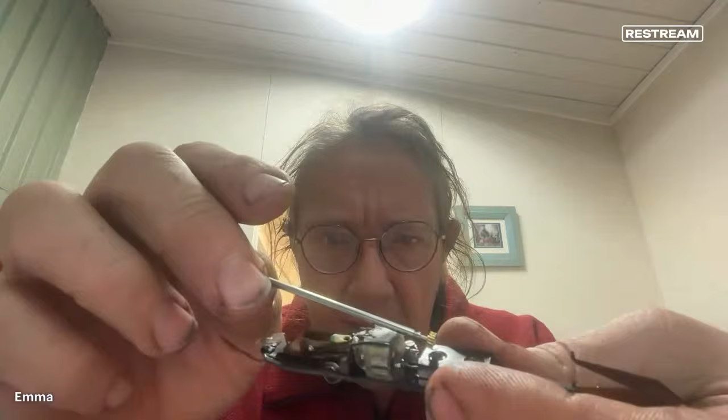This gear here drives off the motor. I don't know if you can see that. If you look at this motor, can we see that? I don't know. Anyway, probably not. In here where my fingers are, there's a gear. There, see that? Can you see that gear there? Probably not. In there. We'll point with that.

There's a gear. There's another gear on here. We'll turn this around so you can actually see it. This actually should drive that gear, and that drives the propeller. Now, as you can see, this stuff's pretty tiny. It really is. And there's a nice brass gear driving a steel shaft, which goes basically through here and attaches to the propeller through this hole in the back.

There's a shaft sticks out this end. I'll take my glasses off so I can actually see this. Right. Now, the problem is, and I don't know how we zoom in on this. Can we zoom in? Probably not. Let's have a look here. Don't know what that's doing. Anyway, all this is a little C-section clip here that holds this in place in a little groove in the shaft.

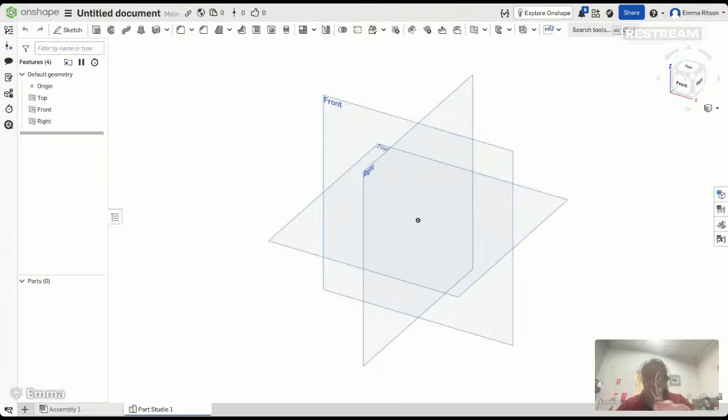And here's this shaft. Now, oh, look at this. We can do this. This is a new feature. We've never seen this one before. Righto. So there's a groove in the end of this, if you can see that. There you go.

The groove is probably too small to fit my verniers in. This pair anyway. Going to need some better measuring equipment than that.

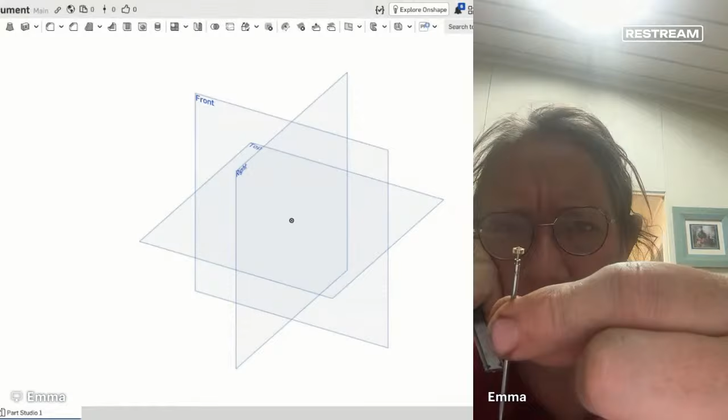It's German, so I think we can nearly guess that the bearing on this end and the bearing on this end would be the same size. That'd be a reasonable sort of an assumption, probably, because the shaft on each side is the same. Just measuring that. And Germans being Germans, I think that's what you will find. So if we measure this one here, we're going to go that's 1.5 millimeters.

The width of the groove, which is a really good question. I should have bought a decent pair of verniers instead of these old Minimax ones that are 100 years old. When I look at them, even the ends aren't exactly the same width. So that was a bit poor.

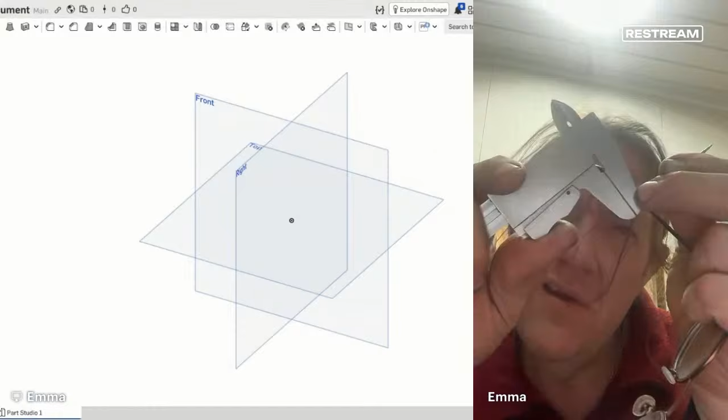It's a bit more guesswork, but I'm guessing that that is probably 0.8 of a millimeter wide, that groove. A fraction more than that, but 0.8 will do us, I think. 1.5.

Take care, John. Good to see you. Got to get up late tomorrow. That's fair enough.

So let's start with that. We'll go back here and we'll go to the front plane and we'll draw a circle on here. We'll just check our document workspace units. Make sure they are in millimeters, and they are, so that's good. We're never quite sure where I've been last time. So 1.5 millimeters.

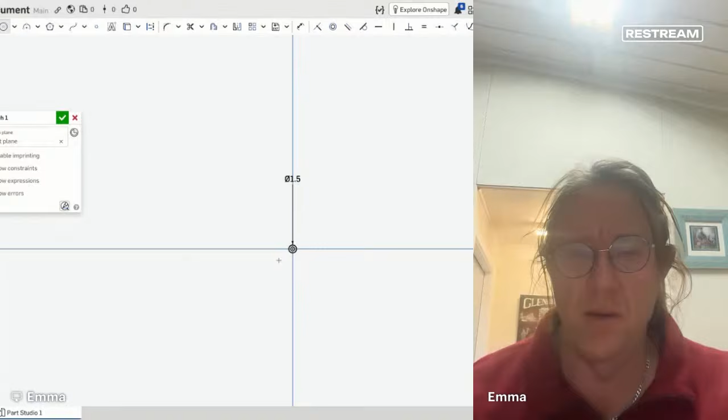Actual shaft diameter is 1.8. I'll tell you what I'm going to do, because these glasses are annoying me. I've even brought my close-up glasses. You can't tell the difference with me sitting here, but if I get up and do stuff, you'll be able to tell. There we go. That's better.

Now, we'll draw another circle. 1.8. And we'll extrude that. We'll call it 25 mil. That'll do. And we'll extrude the inner one. That's not it. Zoom it out so we can actually see it. Let's try changing this.

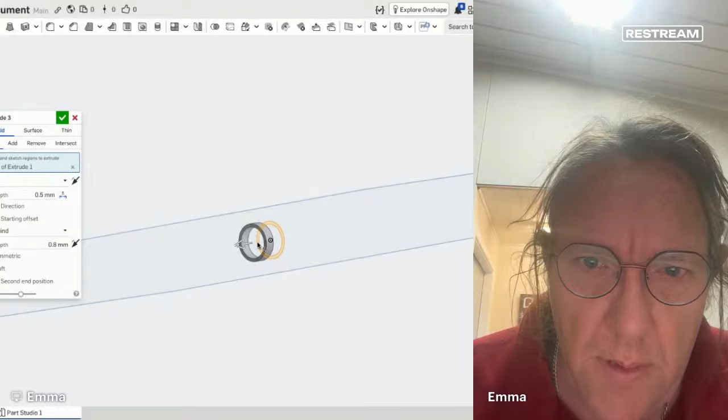Let me see what we've done there. No, probably not. There we go. That's what we're looking to do. So that's what the shaft looks like, and then it's got a piece sticking out for the gear. I won't bother drawing all that, but I'd say the shaft for the gear is probably

0.9 of a millimeter. If we put another sketch on this face here, 0.9, and extrude that one out. We'll call it 5 millimeters. That's sort of what it looks like. Right, blown up. Got a little gear on the end of it. But what we need is a fork to go in there.

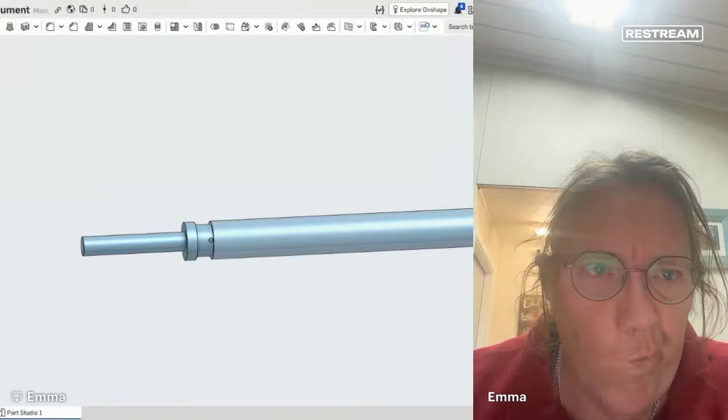So we'll put another sketch on the front plane like that. And a center point arc off there, which will give us a radius. That's not helpful. Let's do this.

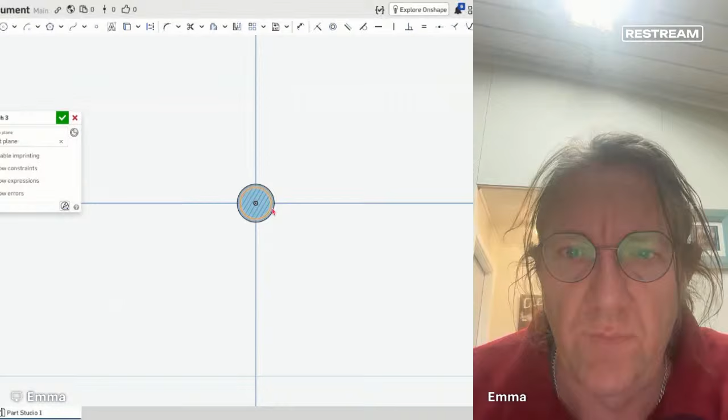A section view with the section plane, pick the front plane. There we go. Gosh, it's tiny. If we blow this up, then we've got an actual section of the groove pretty well. And then we can use that in our sketch. If we turn off our section view and hide this part, we've got the actual groove.

What I think we want is a piece of stuff about 3 millimeters across and probably 5 millimeters deep, and with a groove from here up there like that. Mirror that one with a mirror line and trim that. Extrude that 0.7 millimeter thick.

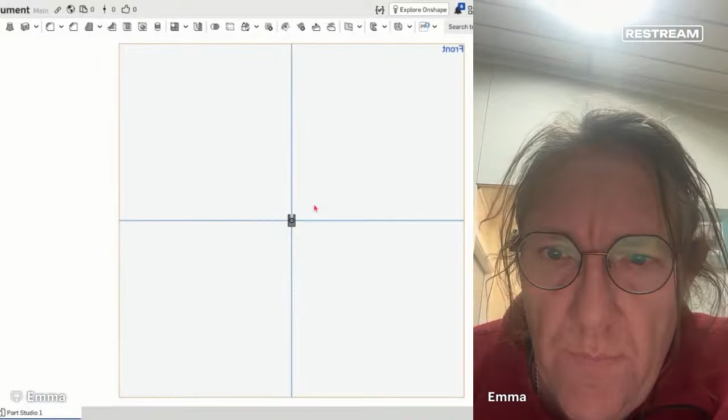Turn that back on to make sure it lines up. It probably doesn't. We probably flipped it the wrong way. Let's go that way. Now, I think that's sort of what it should have, and that's what it had originally. I don't think it needs to be this high. We edit the sketch. Probably put a line across here like this.

Now, I can't see what you're actually saying there, but I'm going to have a look in a minute.

Anyway, I think that's what we need, is one of them. And if we had that with a little offset on here so that we've got a congruent where... don't know, probably cut the other one out and just glue that one in where it should go.

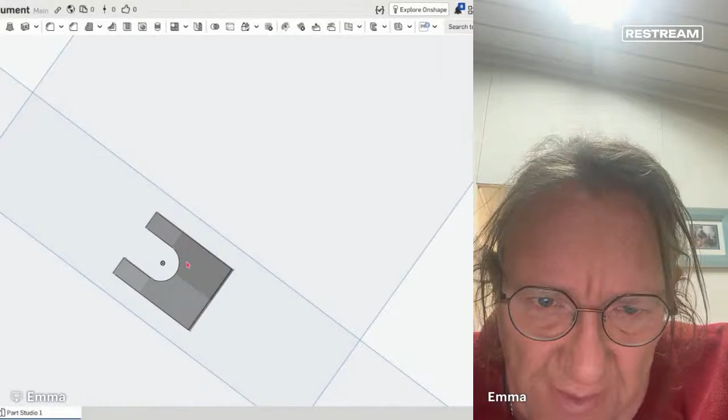I don't know. Or do we leave that piece in place, which is actually pretty much what's left is only the bottom half, and we put an offset on it. I don't know about that. Anyway.

Good luck with the wasps, eh?

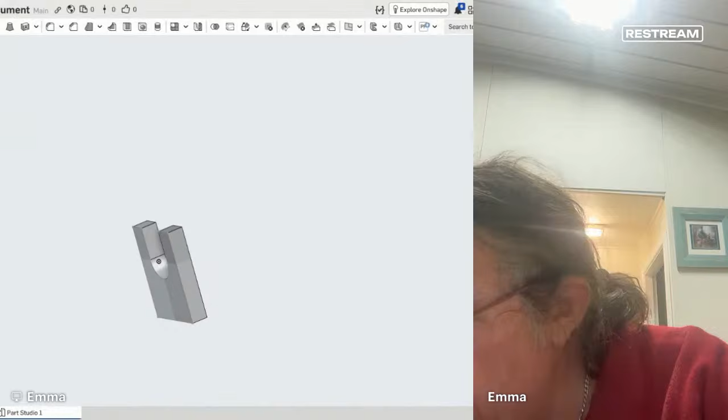Anyway, so that's sort of what it needs, I think. I don't know. Looking at it. Don't know. Maybe it needs to come down beside that.

So instead of having this hole that actually fits over that in the slot, we leave the piece that's still there that it sits on for the correct depth and make another piece. So if we change this, we can just change the sketch. Change this sketch. .045. .45 actually, like that.

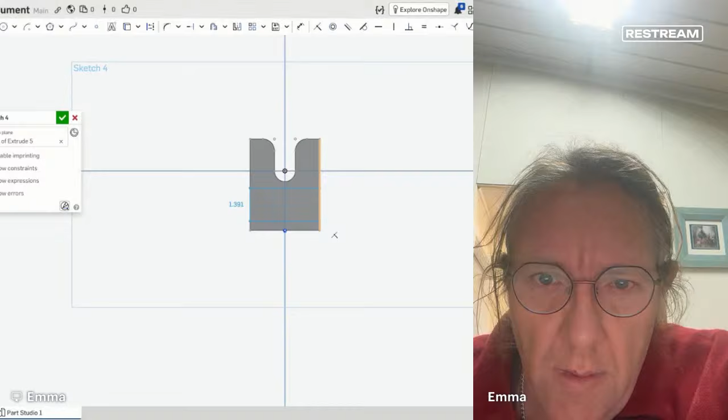We need to make a sketch on the back of this. We'll blow this right up like this. And a corner rectangle we'll go with. We'll start there. We'll come up to there like that. 1.6, something like that. And we'll extrude that out. How far? Let's go 1 millimeter. So that's what we got.

If we printed that laying down like that and put a little dot of super glue on that face there and slid it in after we'd put the axle in and lined it up nicely, I think that should fix a lot of problems. So we might do that. Anyway, that's one job. Maybe. What I'm going to do, if we have a look at this, actually just use the same pickups on the front as the back. So there's pickups on 4 wheels on this.

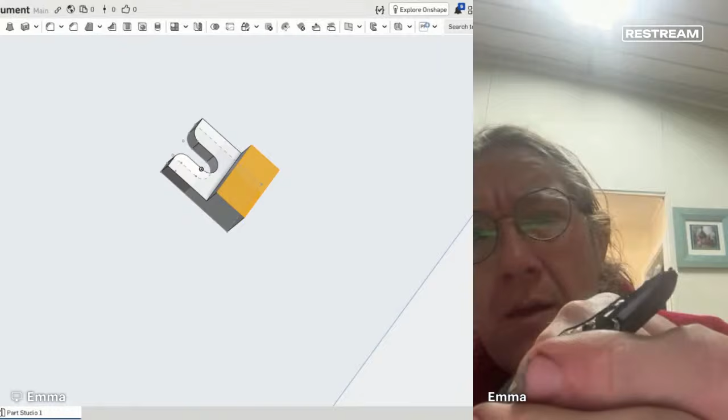We've got a brush and an armature on this end. And we've got some sort of a diode probably to stop any bouncy running. And the motor's screwed in with 2 screws there, one each side. There's a worm drive and another gear in here. So it's 2 to 1 or something behind the axle, because if we see the worm, excuse my dirty fingernails, there's a worm in the front there above my finger. It doesn't line up with the center of the wheel. So that must be geared down there.

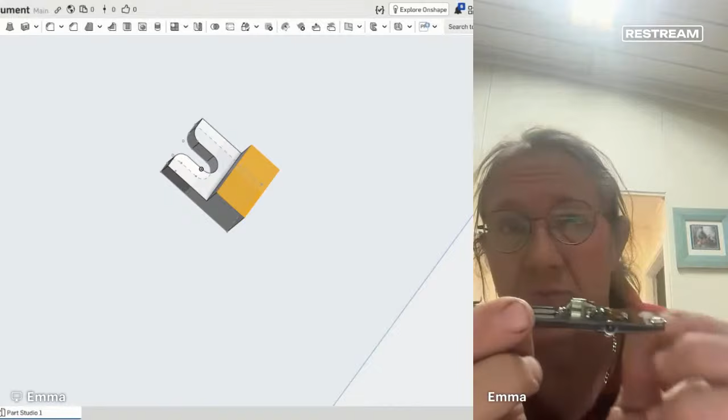So the propeller drives off the back of that motor. See, off this end here. It's got a light on the front. Oh gosh. A globe on the front there, if we see that. And that works in a prism. It gives us headlights. There's no tail lights in this one. So it's quite a simple thing. All I'm saying is that if you want the brand new one that's in the catalogue this year, it'd want to be very, very good for the price that they're actually charging for it.

I believe this to be actually die cast. It's very, very thin, but it is die cast. It's got to be a fun thing to put back in. But it's gone.

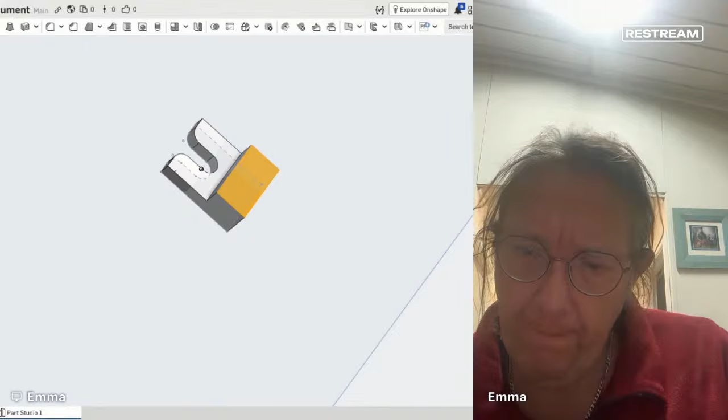I'm not sure I'm going to put this back together till I fix it, but these pickups stop the vibration too, so they've got to slip back inside the case. On the back. Hasn't actually slipped up in there yet, but give you some idea.

Very cool machine. I'm going to put that back in there upside down and that in there too, and we're going to print a piece and glue it up, and maybe tomorrow night I'll put it together. Anyway, one job. Now, that's the technical job.

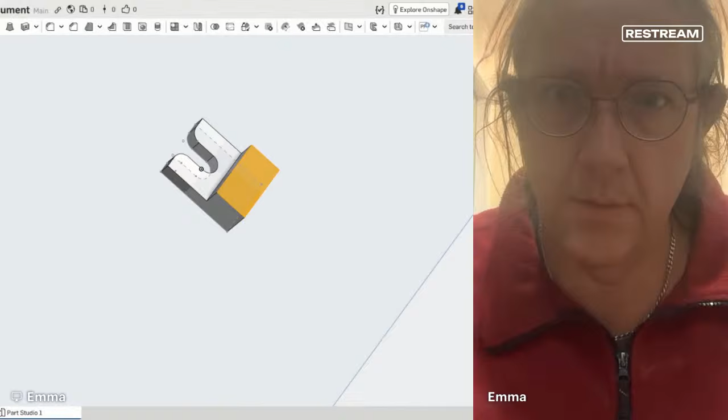Now, I can do this too, apparently. No, I can't. Nope, that doesn't work. Anyway. Fashionable.

What I have here is a disassembled tube expander. It's got 3 rollers in it. It's fairly straightforward. Really fairly straightforward thing. I was going to try and take it apart, but I haven't got it apart. Probably be enough to make one.

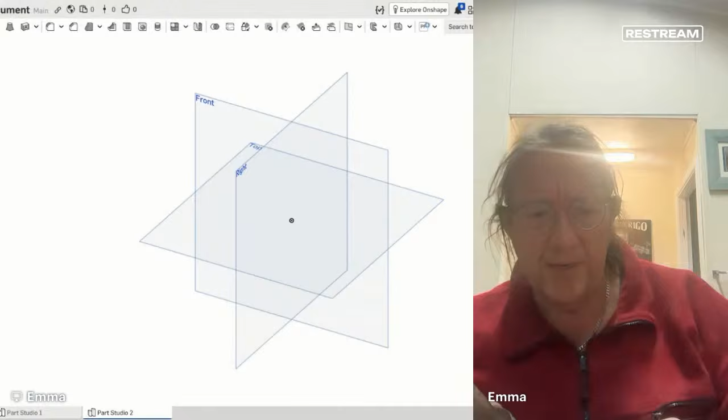We've got a collar. We should have a roll pin in it to line up with this groove, but the roll pin's missing, I've discovered. So it's probably just as well I worked that out before we tried to use it. All right. It's got 3 little springs in it to hold it all parallel. That's how that works.

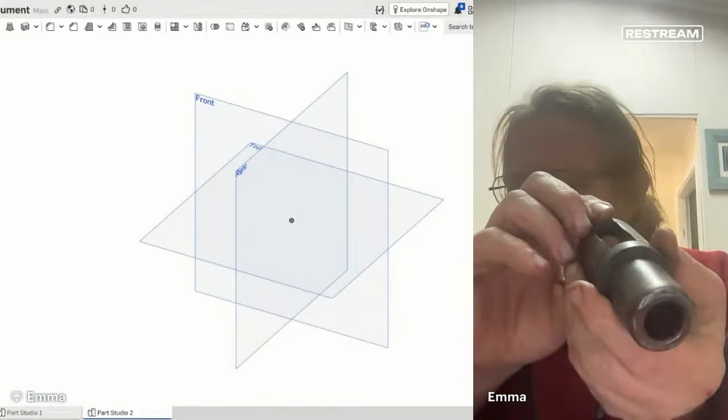And it's got some interesting geometry in here, so I don't know how it's made. It all seems to be one piece. Maybe. Seems to have 3 holes cut in it that seem to be fairly critical. And a parallel hole through the front, through the back, and right through. So the hole's the same size, I think, on that side as that side. So this hole goes all the way through parallel.

And then there's 3 little wire springs in there. I don't know if you can see that. There's a pretty good chance you can't see that. 3 little wire springs that hold it in, and that's the secret to what keeps them parallel. They're definitely springs, and they're definitely wire, but they seem to have been drilled. Honestly, don't know how this comes apart. It must come apart.

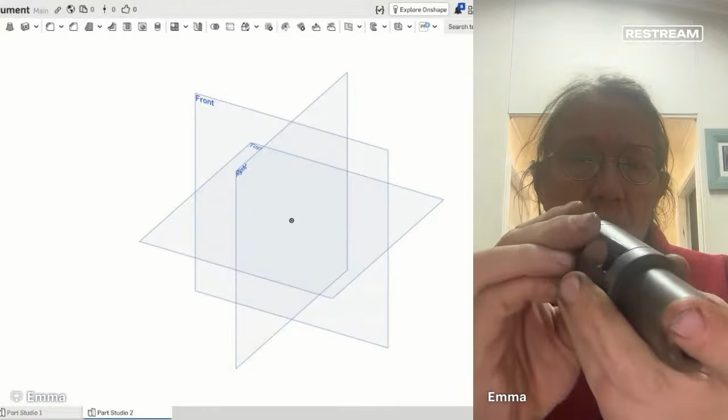Maybe it's all one piece because it has got a bit of a skew on there, and I don't know if that's original or not. It could be just overuse. If you're making one, I don't know how you would drill and put those 3 little springs that hold everything together in there. I really don't know how you would do that. Anyway, let's draw it up and see.

Where do we start? Probably with the body. At the beginning, maybe. One inch 640. Inch and 5/16. Inch and 5/8. Inch and a quarter. The hole through the middle is 715 thou. Both ends, like we said. So let's draw this up and see what we end up with.

For those who came in late, all we've done is messed around and made a part from a broken Märklin locomotive. Try and get that fixed and demonstrate it next week.

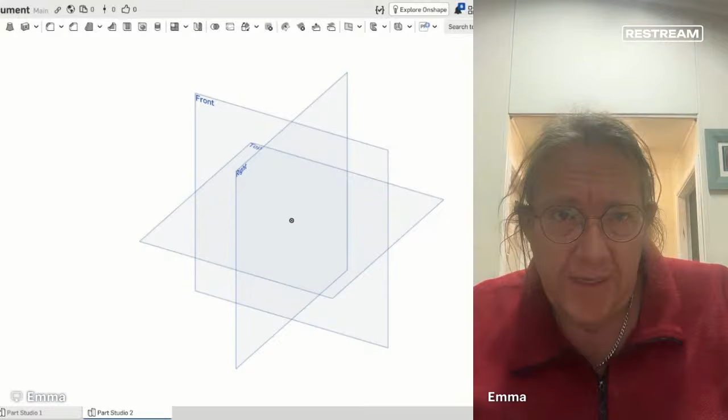Looking at this, we're going to change this. Drop this down here to where it says workspace units. We're going to change this to inches because we can. And tick the green box. Now when we start a sketch on the front plane there, we can draw a circle and it comes out inches rather than millimeters. So first circle, 0.715, which is a hole through the middle.

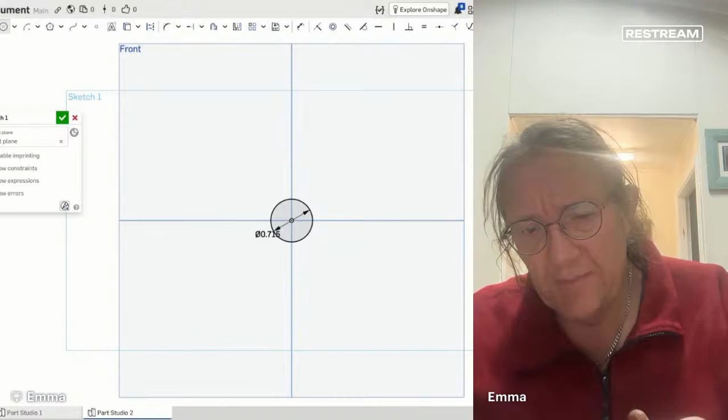Then the outside here is, depending where you measure it, 1.650, 1.620, 1.650, 1.660. And that must have a taper on it. 1.645. It's got a taper on it. It's only 15 thou, and maybe it's just wear. Are we going to worry about the taper? Probably not. Let's make it the full diameter.

1.665. There we go. Probably the first thing we do is extrude that along, and it's got to be how long? 2 and 5/16. 2.3125. There we go.

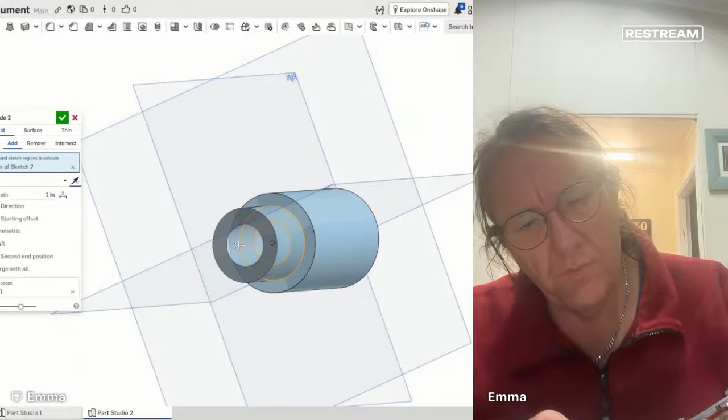Now, let's put a sketch back on this plane at the back of it. We'll call that inch and a quarter. 1.25. And we'll use this project or use button here to collect that. So now we've got the two sketches. We can extrude that, change the direction so it looks like that. And we'll make that, how long is it? What did I say? Going to call that 1 5/8. 1.625, something like that.

We've got the main body drawn up. And put a fillet on there, which is, let's call that 1/8 because that looks about right. And that's the start of the first piece. You know we haven't brought the pin down, don't you? We're aware of that anyway.

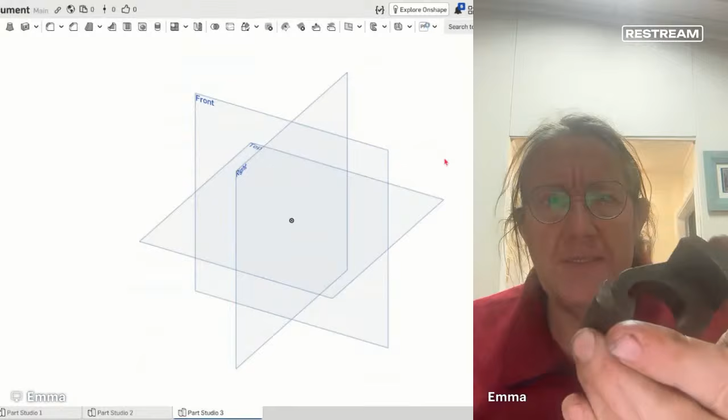If we start another part studio here, and we draw up this part, which is the spacer off the tubes. Not a particularly complicated thing. Where do we start with this? We start with a circle that's 2 inches diameter and another circle that's, call that 3 1/8 inches diameter. It's actually 3 3/32, so it's a bit less than 1/8.

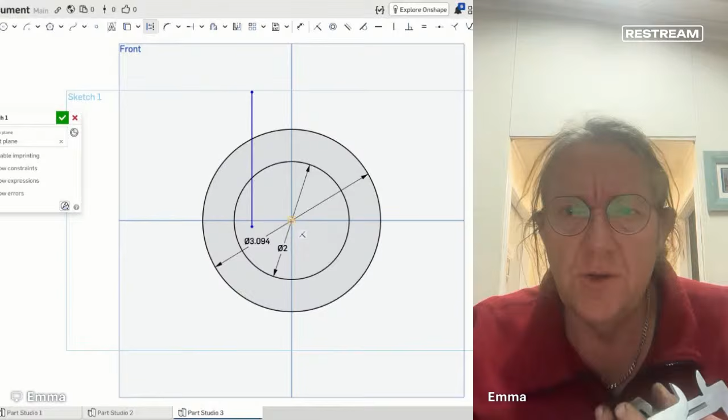And another circle that's 2 inches diameter. And this on the end, across the end here is inch and 5/32 because someone was really being helpful there. So we need to draw a line across up here like this, probably the easy way to do this. And then another line here, which will make a construction line from the center up here. And then we can just measure the distance across those lines.

With a dimension on there, tap on that. That gives us the actual dimension, which is 1.5375, which is a stupid fraction, but there we go. And we probably should mirror that one. Use that as a mirror line, mirror that one. And we need to extend this one down to here. And this one down to here. And then trim this piece.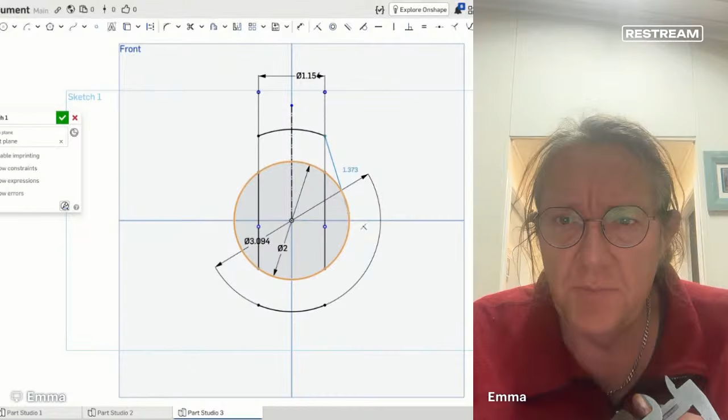Trim on this, so we've got that circle there and that circle there and this circle here. So what we need to do is go from there and attach this one here where, see, when we move that, this one is attached to the point, but if we move this back here, we get a tangent there, see? So that's what we want. Press escape there. And the easiest way is just to use that as a mirror line and mirror that one. Use that as a mirror line and mirror that one and that one. And then trim that out of there. And we've got the actual shape.

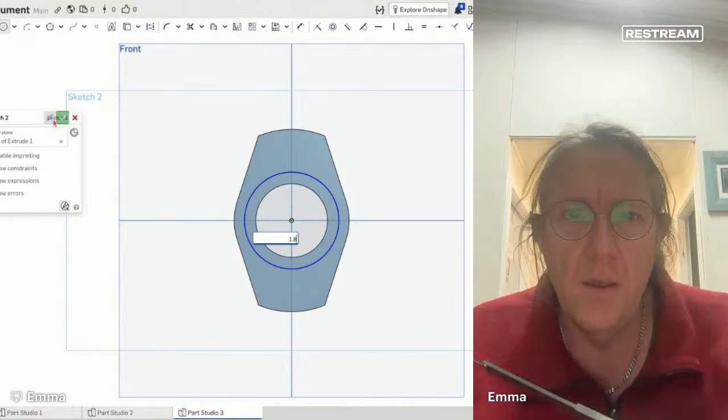If we have a hole in the middle, which is the same 1.25 inches, 1.25, and we extrude that shape 1.125 inch. Stupid fractions. We've got basically the start. There's a boss on this end which is 1.8 inches. Don't know why. There. 1.8. And the project or the use button, we click that too, then we can extrude that.

And how long does that stick out? Nothing on this is a standard fraction, really. We're just making them up as we go along. Maybe it is metric. 0.2 an inch. That's how that looks. It's got a nice flange on it, so a nice fillet on there. So we might just guess that, something like that.

And this centerpiece in here that cut out. Yep, always forget something. I'm a bit disorganized. That's cut out. What do we got? 3/4 inch cut out. And this circle here is pretty roughly 2.5 inches. This is a lot dirtier than the last job we did.

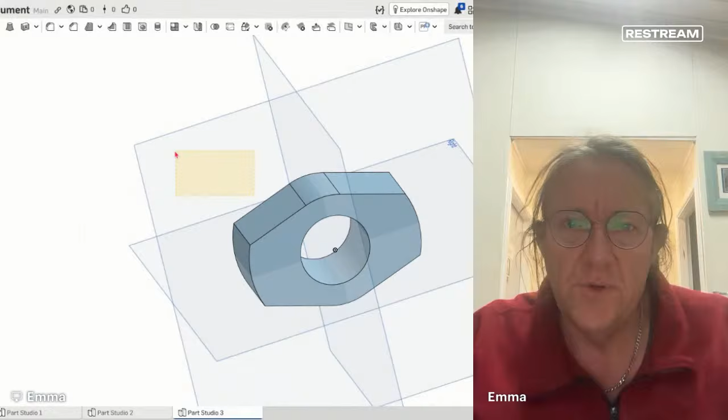So on the other side to the boss, we turn this over. Yeah, on this side, we sketch right on that plane there. Put a circle on here, which is 2.5 inches, we said. And extrude that removal 0.75. That's that piece made. So it's pretty straightforward, but that's what that looks like.

Just to distinguish it, we're going to edit the appearance and change it to a different color. So we'll change it to light green, something like that. These two bits go together like that, see? Now this thickness across here should be about 9/16. If we use the measuring tool, look, there's 0.575, that'll do.

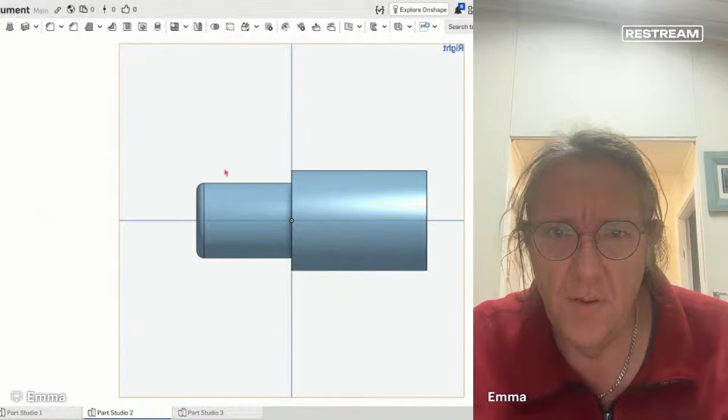And what we found is that this collar is the same size. Oh, it's a bit bigger. It's not going to work. I was wrong. It's the same size as that, though. So new sketch on that plane. If we use that line there, we've already got that one. And another one here, which is 1.8. And then we extrude that. And it's a new piece. It'll give us a different color.

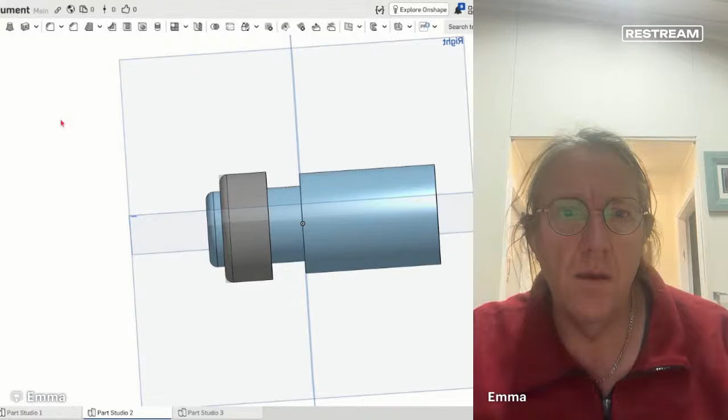And we make it, how wide is it? 0.8. And we have a starting offset of 0.575 is what we said. That's where that collar fits. Collar's got a matching fillet on this side, so we just do that. And it's got a pin through here, which looks to be probably a 1/4 inch roll pin. Yep.

So if we put a sketch in here and we use a project tool, select that, click that and turn that into a construction line, and we use that line too. And that line, we can extend this line here to there. We're done there. Is that right? We can extend this line here through to here. And it's not quite right, so we're going to just trim that. Like so.

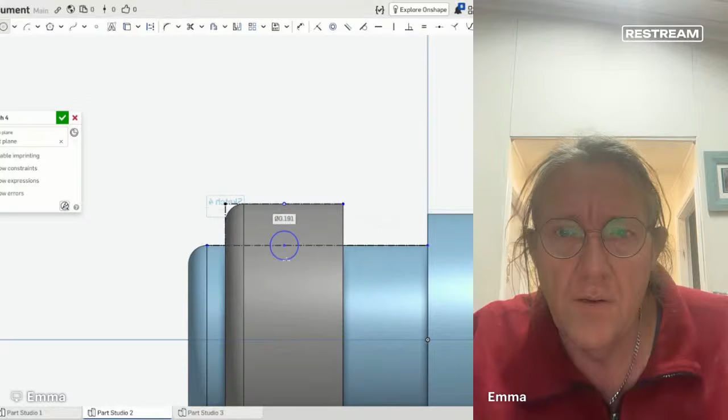Now we can draw a 1/4 inch circle on here, directly in line with the center of that line, which is the edge. And extrude it. Make it symmetrical. Make it 2 inches long. Remove it from this piece and this piece. And we've got a hole there for a pin. If we take this away, we have the right cutout there, which is the same as what we've got on here. There, see?

When you redid the spindle on your lathe, I assume you use carbide for boring it out before re-sleeving.

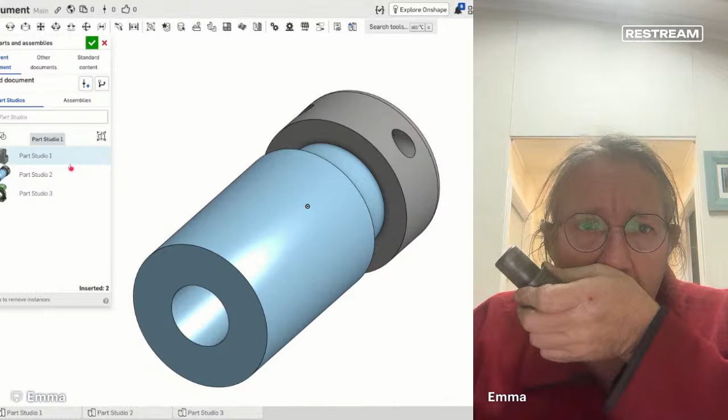So we can probably assemble this. We insert this part. Oops. Try again. So we make a mate on this face here. That one. That one. Then fasten these. And that needs to be offset. Oops.

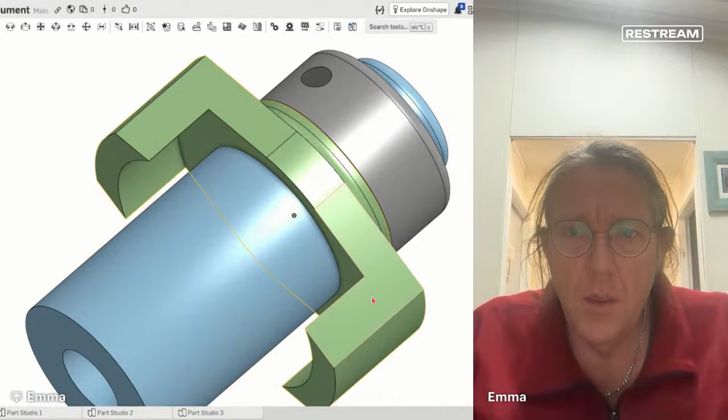Try that. There we go. That's how that should work. Part one's this one. If we fix that, and that should spin on there like that nicely, how it should. That's how it should work. Now,

That's a bit disappointing. 10mm collets are a bit small and useless anyway. Morse 1 is not really the answer. If I was doing it again, and I'm going to address this problem rather than this, I wouldn't bore it Morse 1. Here you go. What I would do is bore the spindle nose out to ER16, I think, and make a special nut for it and put 16mm ER collets on it. I think that's what I would do.

As far as that's what I would probably do if I was putting a new collet system in. I don't think that I would use Morse because I don't think it's particularly useful in the spindle. I would probably have a good look at it and draw it out. And if there was enough space, I would machine the spindle nose out, set it up nicely on center.

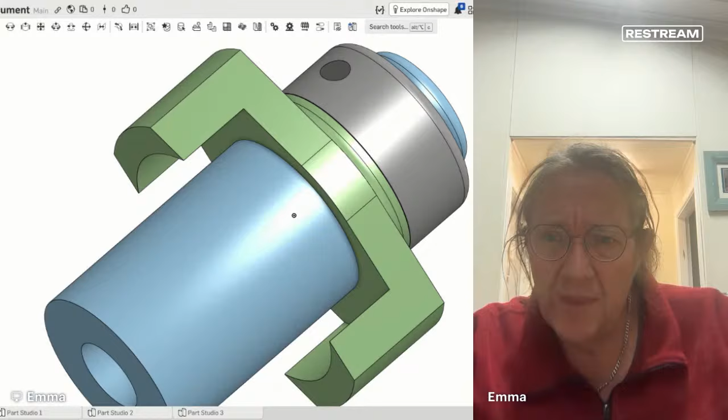This is a bit of a challenge. Out of the machine and bore it in a bigger lathe or in another precision lathe or something like that. Bore it to ER16 and then make a ER16 nut with a spindle, the same thread as a spindle, which will be 3/4 16 or something stupid. Anyway, that's a thought. That's food for thought. I think that's what I would probably do because that would make a fairly useful machine out of it. And give you a bit more through the drawbar too, which would also be helpful.

Anyway, so we've got this sort of half-assed right. Now, with this spinning like this, now some interesting geometry in here, guys.

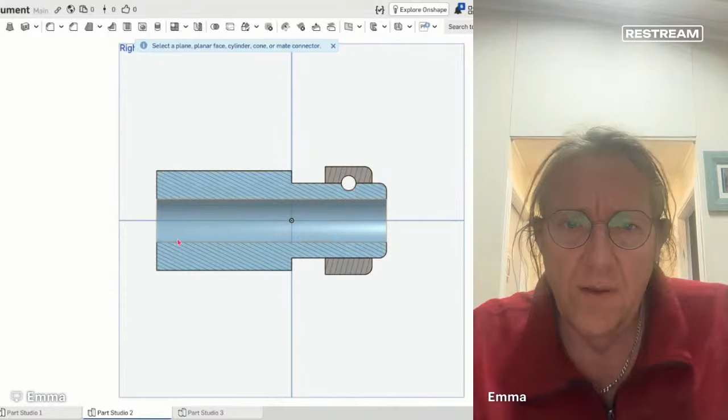So you know. Firstly, there's a relief in the front and the top here. If we go back to this Part Studio 1, Part Studio 2 it was, here. Right. If we make a section view here on that plane, that's halfway through, right? And we do a drawing on this plane, sketch on there.

What we've got is we're going to use this line, I think, and this line. And we'll draw another line, which is probably about - I'm only guessing this because it's impossible to measure. If we go back in here like this, and then measure from there to there. And we'll call that it's about 5/32,

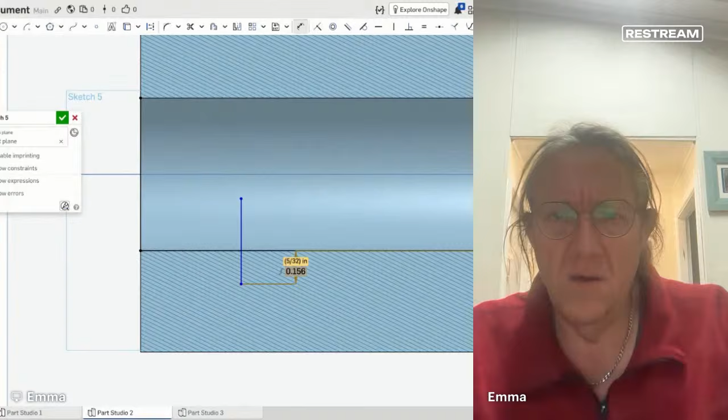like so. And then this distance here, which we can measure, is about 1/2 inch. So from there to there is 0.5, right?

Now there's another line. Measure here, another line here somewhere. Bear with me here. That's impossible to measure too, but I reckon it looks to be about 1/16 of an inch. From there to there. Then this line here goes from here, where these two intersect, down to the end of this.

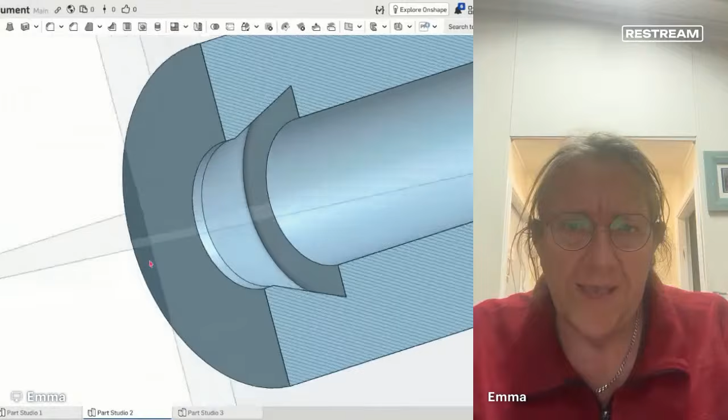And then we can draw another line there like that to make a section there. And we can revolve that. What we need to do though to do that is on this sketch still, we need to put at least a construction line down the center. Something like that. And then we can revolve that. Revolve axis is this one. And it's a removal. So that looks something like that inside there, right? For reasons that will be apparent at some point in the future. Are we following? Because I'm not.

ER11, yeah, that's the trouble. But you may not get - if you can get collets, that's great. On the lathe subject, if you can get collets, that's excellent. Anyway, if you can get collets, that's great. But good luck with that. Collets and drawbar are definitely a better system.

And I would have a look at Sherline because I believe they probably do a 10mm collet set if you've got a budget. If you don't have a budget, maybe that's out of the question, but I think they do a pretty nice collet set. Worth a look. And probably just adapt it to fit them because Derbyshire collets or Lorch collets or whatever will probably all fit. They'll be different threads and things. So you might have to make another drawbar, but that's not the end of the world.

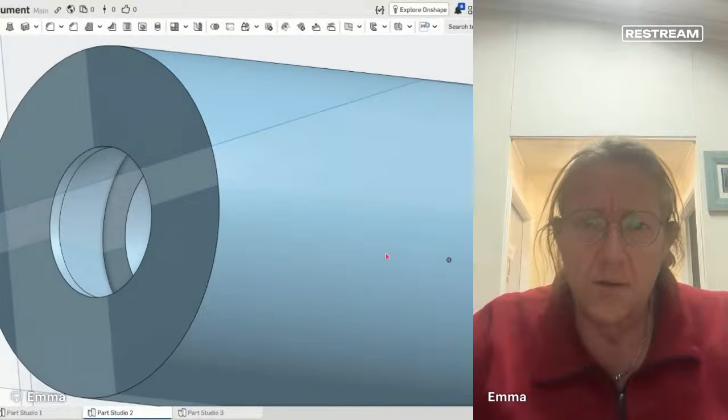Anyway, if we turn off this section view, what we've got is that hollow inside there, something like that.

Now, there's some interesting geometry in these, I think. I really don't know how they make them rather than just machine them and file them. I don't know if there's any other way to do this. But what we've got is a slot in the side of this.

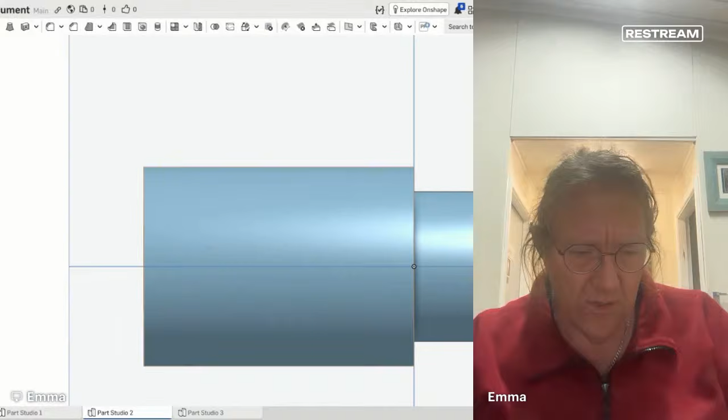So on this surface we need to put another sketch on here, on this plane. Now I'm going to draw a line in here, and I'm going to put a measurement between there and there. It's 3/8, 375 thou.

And we're going to do the same on here. Measure this one and this one and make it the same, which is also 3/8. We put the fraction in, but when we hover over this, it gives us the fraction and the decimal, so that's useful.

Now, that's all very well. But this slot isn't straight. There we go, there's a helpful thing. I reckon it kicks over 3/32 of an inch. How do we do that?

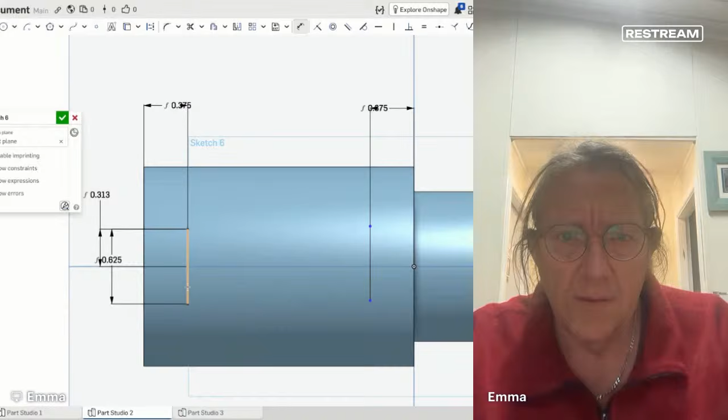If we do the same on this one and call that one 5/8. Make the same measurement here and call this one 5/16, which is half of 5/8, right?

What we need to do is move this one 3/64 that way and that one 3/64 that way. So what's 5/16 plus 3/64? 5/16 in 64ths is 20, 10/32, 20/64... 23. 23/64. There we go.

Now, 17. 17/64, like that. Then we can draw a line across here like this. And this is sort of something like what it looks like.

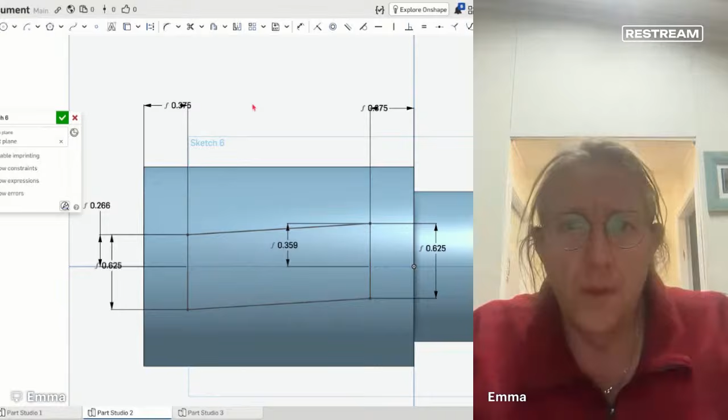Let's select that first. All right. So if we extrude that as a new piece, which will show that as a different color. All right, and that's right in from the center. That's not how it looks though... actually it is. That's how it is. That's exactly how it should be.

Righto. If we look at the front of that... oops, we'll zoom that in without making anyone seasick. And then we click that, and then we do an array, which we can probably find here somewhere.

Circular pattern. Entities to pattern. Axis of pattern is that one. And we want 3 over 360 degrees. Then we add them. The merge scope is that one, and we've got those 3 pieces.

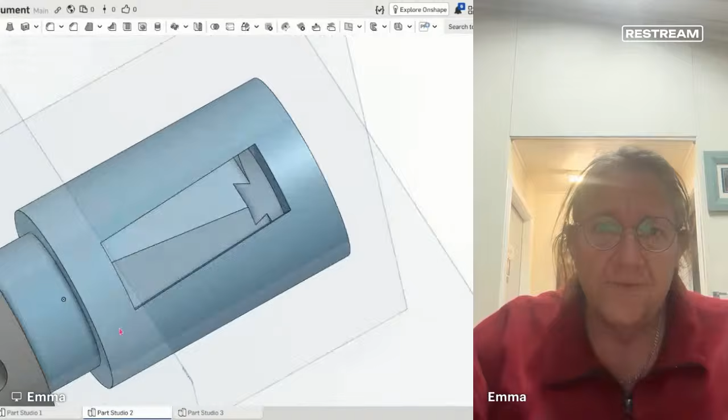Now, this is a fun thing to machine, isn't it? It's pretty much exactly how it looks.

Now, there's one pin in each one of these grooves on one side.

I'm going to go to the bathroom. It's all right for you lot. I don't have a way to do that and fix this screen so you get anything else. You probably can, Mark does it all the time, and he's a legend. I'm not going to do it. So I'm just going to walk through that door there, and I'll come back. You can talk amongst yourselves.

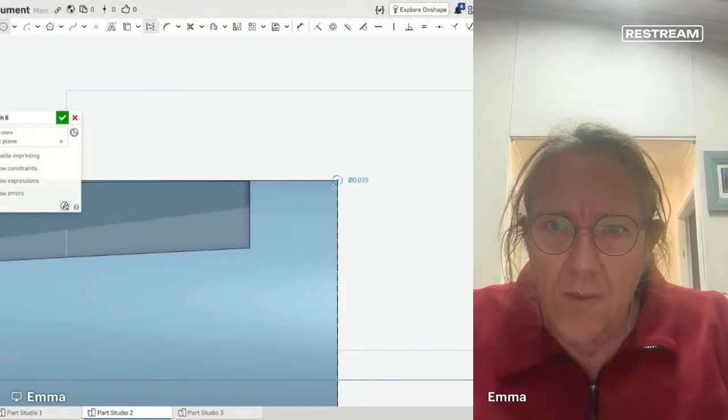And we're going to use this as a center line, and we're going to draw a circle there, which is about, probably, 40 thou, something like that.

We're not going to make that one a construction line though. What we're going to do is revolve that around that to give us a new solid.

Like so. Not going to add it in, we're going to make that a new one. And we're going to move that. So transform that, and transform by XYZ. We're going to move this one back, um, 3/8.

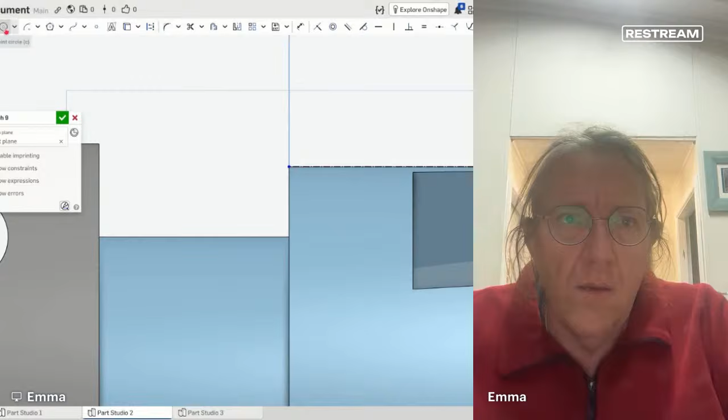And then we need to put a circle in here like this. 0.04 is 40 thou. Revolve that one, it's a new solid. And the revolve axis will be that. And make that a new one.

And then this one we need to transform.

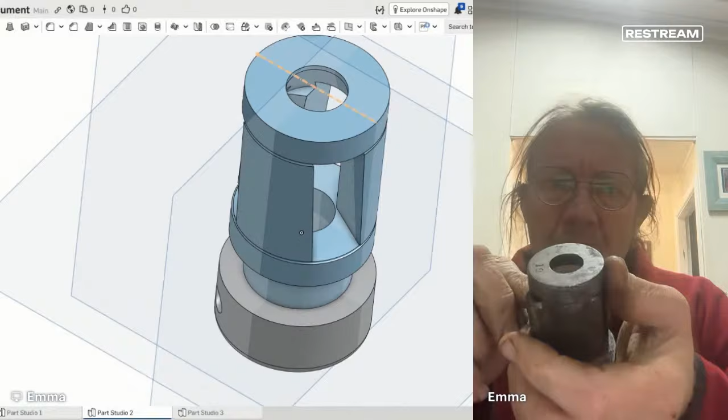There's a groove in this side. I don't know whether that's cast in or whether it's actually machined in, I'm guessing it's sort of cast in. It's pretty rough, but it seems to just give clearance. Looking at it, it's in this side here. Put a sketch on there.

Try and use as much of the geometry as we've got there. So if we use that line, and then we offset that line the other way, about what? It's not 1/4 of an inch, probably 1/8 of an inch. It goes to about there, and it goes to about there, something like that. It's fairly rough, actually, but I think we're going to call that.

And a centre point arc around there. No, I think we're going to do this differently. Let's do it this way.

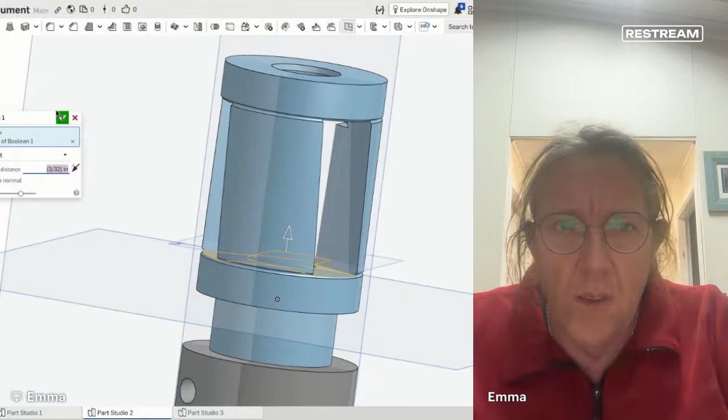So then we can put a plane on here, offset from there. Plane offset from that surface, 3/32 of an inch. And we can do a sketch on that plane. It's a lot of messing around for something I thought was going to be fairly simple.

We can mark that point on there somewhere, can we? Have we done that? That's not what we want. What we want is to draw a construction line from there. Maybe we need to mark this line. That's not right, what we need is a point. There we go, a circle like that.

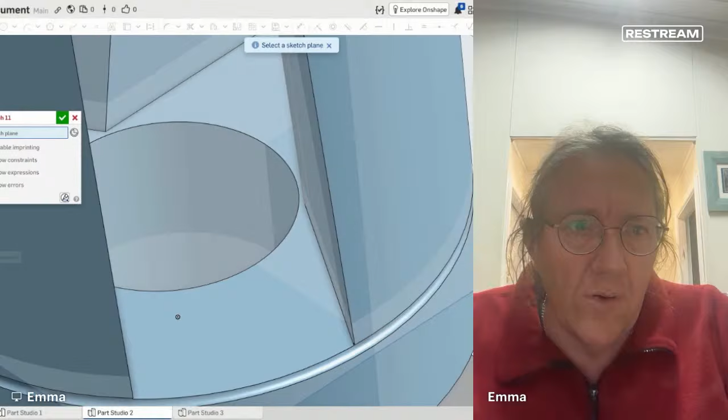Except it's not what we want, because what we have - that's where we're going wrong - is we've got our sketch on the wrong plane. Our sketch should be on plane 1. And then we can do this. That puts the point in the right spot. We can go from there and we can put a 1/8 circle on there and we can extrude it.

Theoretically, that doesn't work because our plane... it's interesting, isn't it? Have fun. What time is it? It's 9:20. We probably need to finish this another time.

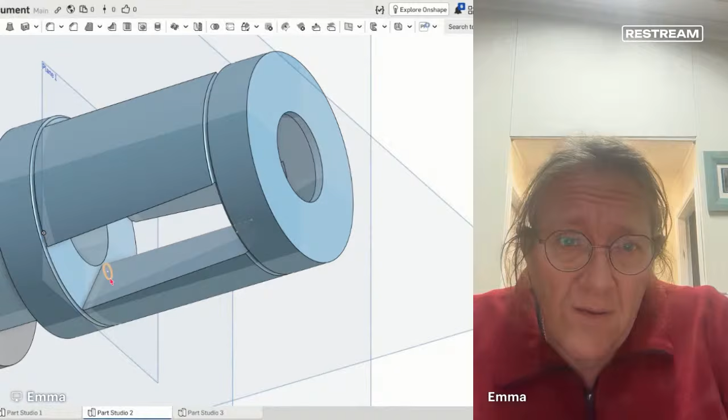But this plane here needs to be on an angle to match this. So let's edit that plane. What we're going to do is a line angle plane.

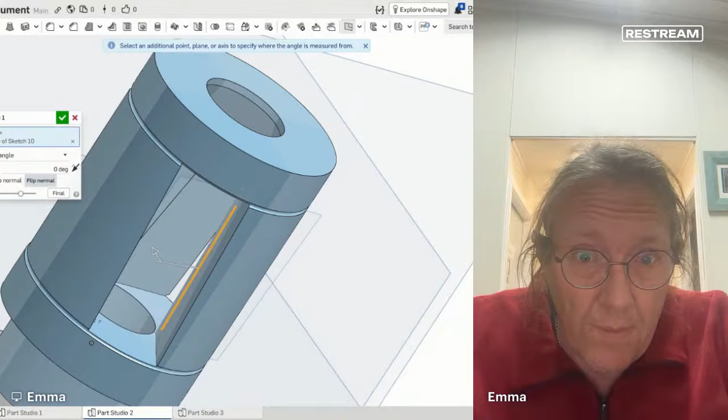That's interesting, isn't it? No idea, there you go, I'm lost. It's getting late.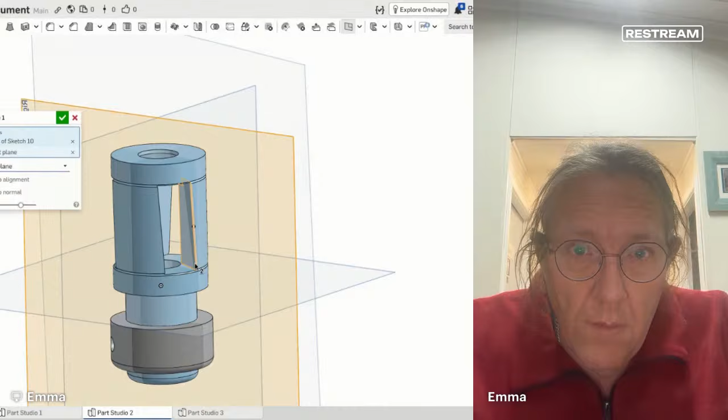That's how we do it. Wow. New plane. Maybe. Don't know how we do that. There's some fairly interesting little geometry in there. Let's do this anyway.

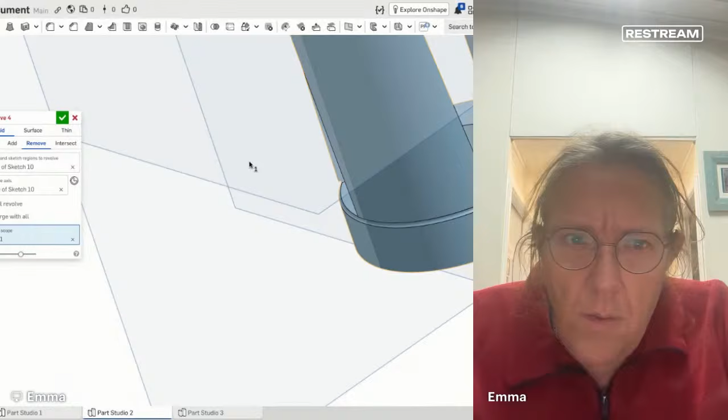Don't know, I have to have a think about that. We might come back to it next week. It's getting late. But it's not a particularly simple thing when we have a look at it. That's what we got so far.

For some reason, this doesn't line up anymore. It's because we fastened it onto the wrong end. Let's change this, fasten this one to this one.

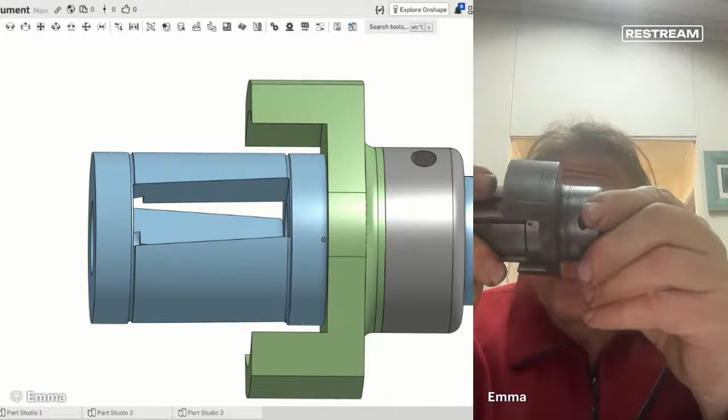It's a complicated thing, it's a tube expander. It's more complicated, I've learned a lot about them that I didn't really know before. It is quite a complicated part. Whether we can actually draw the rest up, I'm not sure. I'm sort of finding some struggles there, but I might just be getting sleepy. Anyway, we've had a bit of a play with that, and we've got something like it's supposed to be.

I would say that those 3 slots in there are very, very similar to what they should be, except that there should be a bit of draft on one side so that these don't come out through the front. That's another thing.

We're going to have another look at that. We've also done a repair CAD, a little repair part that I'm going to 3D print. It's under about 5 millimeters square for a little Märklin locomotive that's got some issues.

Bought secondhand, of course, and if I send it back, there's my other glasses back on. If I send it back to Märklin or back to a serviceman, it's going to come back with a new body on it, and that's going to be probably more expensive than it should be, if that part's even available 40 years on. And it probably isn't. So I think we're just going to fix that and have it back together and running. I might have a play with that tomorrow night.

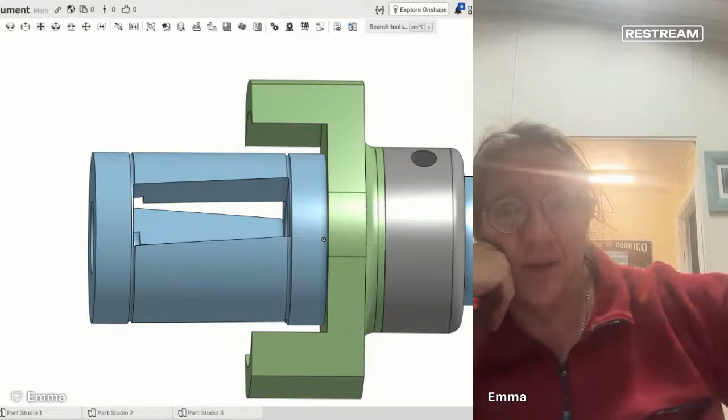Now, I don't know if I'm going to have a live stream tomorrow night. I do have telephone problems until probably Friday when I can go and get another one. This is dead. It's actually 58% charge in it. If I unplug this and press the button and open an app, it'll just die. Like it'll crash and then restart, and it'll have 10% battery again. So it's got some problems. So I'm going to have to go buy one of them.

Hopefully, if I leave it plugged in, because I've got 100% on my laptop, if I leave it plugged in when I go to bed, hopefully my alarm still works and I get up in the morning, because without the alarm in the morning, I'm not going to get up. Simple as that. Anyway, that's about it. I could do it from the computer. That's a bit of a pain. I might even do that tomorrow night. We'll see how we go.

I've got things to show you. There's things I've done. There is some progress on various jobs. And I'm actually sign painting full force down there in the shed.

So anyway, the battery has reached the end of its life. Yes, that's correct. It's not just the battery. The screen's fallen off, and that's probably a contributing factor. And probably the microphone's become badly connected. I think at this point, an iPhone 11 probably needs an upgrade. So I'll probably think about something a bit more modern in a rebuild, or a refurbished one. Refurbished 13 Pro, which might be what I'd like, is about $500. So I might just do that on Friday if I can find one.

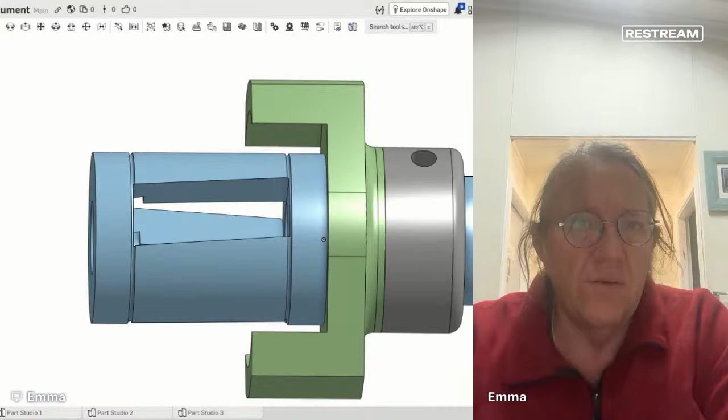iPhone 15 is $1,000. I really don't want to spend that. $1,200 for 16. $1,800 for a 17 Pro. $1,300 for 17. Anyway, I'll go and see what I can find. I know everyone says, don't buy an iPhone, don't do this, don't do that. It's all stupid talk, because I want something that talks to my watch. I want something that talks to my laptop. And that's where we are with that.

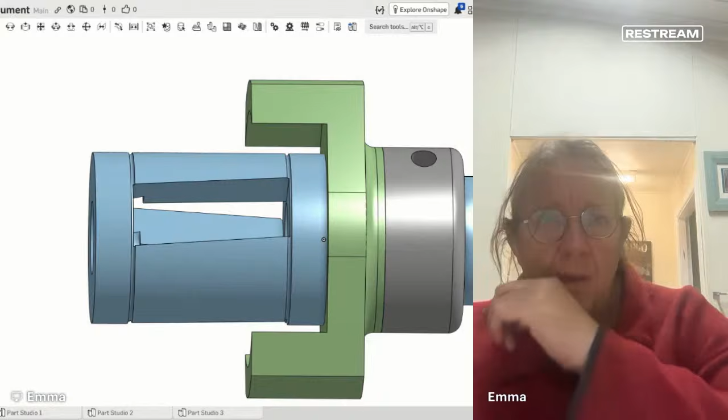New Android's exactly the same price. Top of the range Samsung, sort of $1,800. Anyway, it makes no difference which one you get. They're all about the same price. A 14 is getting on a bit. A new iPhone 14 is available still, but a refurbished one's fairly cheap. So that's about what I'm going to do if I can get one. I'll take some cash into town and see what I can find at the mobile phone repair shop. They're pretty good.

Anyway, Peter, you can't actually know that. You're making things up now, is what's happening. That's an opinion, is what that is. You're making stuff up.

Anyway, I'm going to go pack up, put this locomotive somewhere safe so it doesn't get damaged. It means I'm probably going to take it down the shed. Put my reading glasses away because I probably should use them more often on live stream. Put my book away. And do some dishes. So, anyway, we'll see.